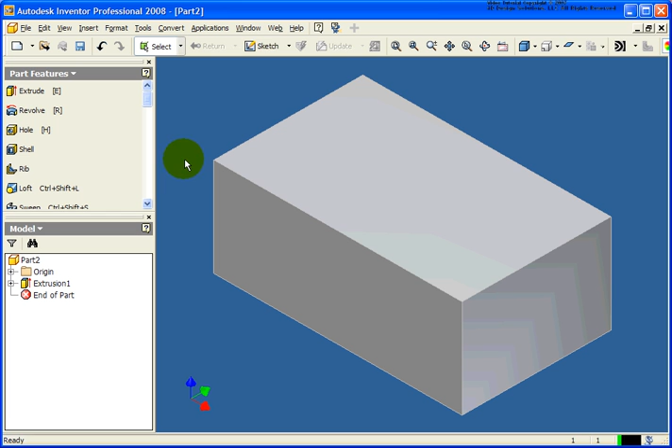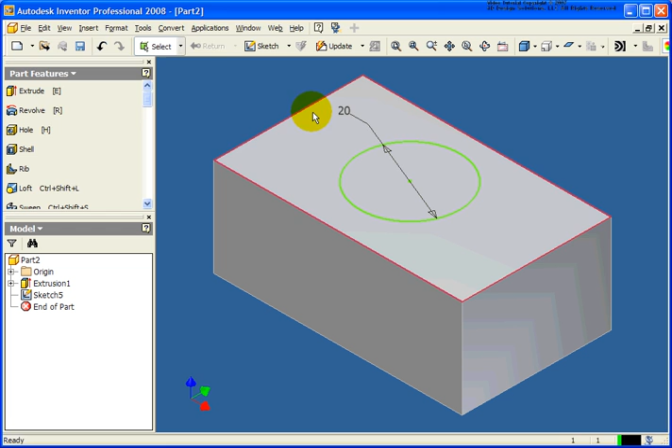So to start off with here, I'm going to create a sketch on the top of this rectangle that I have. I'm going to place in a circle, and I'm going to dimension that circle, and let's make it 20 millimeters in diameter. I'm going to return, and let's extrude that up, and let's take it up 10 millimeters.

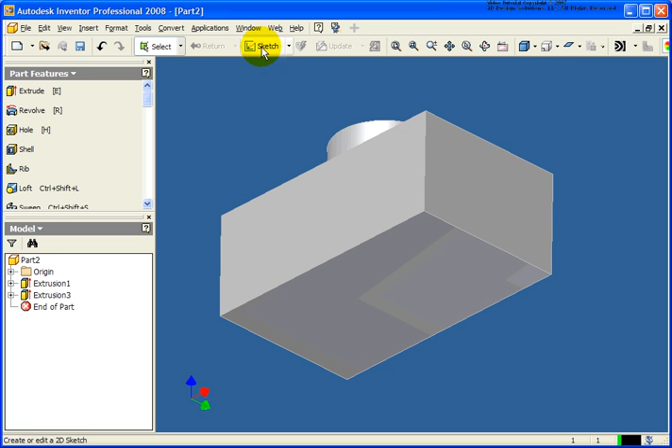So what I want to do now is have the exact same feature on the bottom of this, except in this case I want to create a cavity from that geometry. So I'm going to place the sketch on the bottom plane of the part. But now instead of redrawing that circle from the 2D sketch panel, we'll scroll on down till we get to the Project Geometry tool, and I'm going to select the circular edge. Now in this case it wouldn't matter if I selected the top or the bottom, being that they are exactly the same.

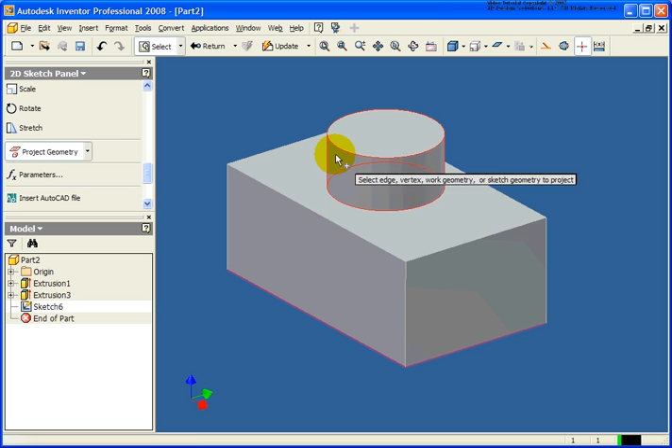Now if I spin the model around, you'll see that that circle has been projected, and what I'm going to do in this case is extrude that circle, and I'm going to cut the geometry in 10 millimeters.

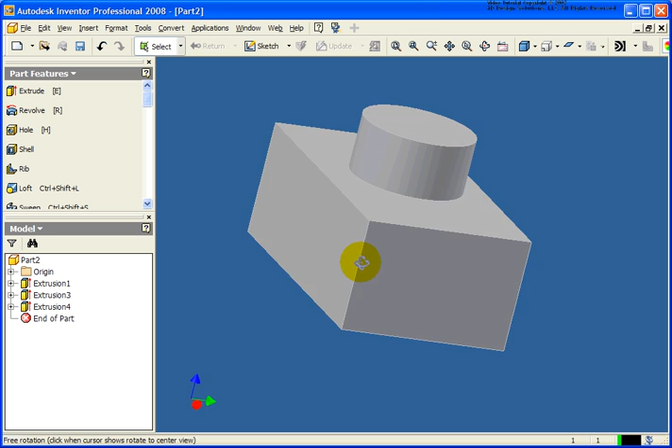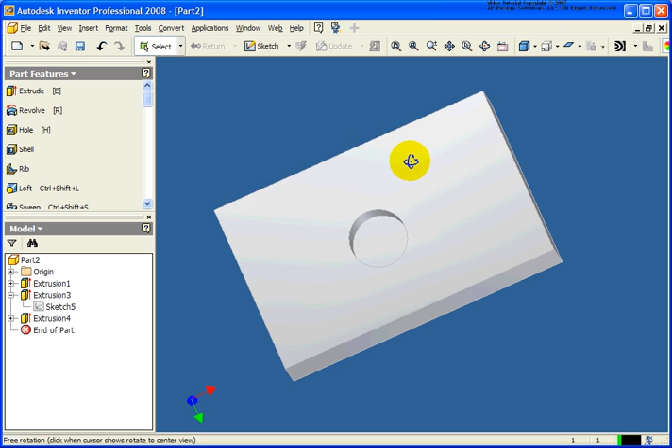Now there is a relationship between those edges at this point. So let's go back and modify the 20 millimeter diameter, and let's make it half the size, make it 10, update, and it updates of course the top extrusion, but you'll notice that the bottom cut has also been changed to match the projected edge.

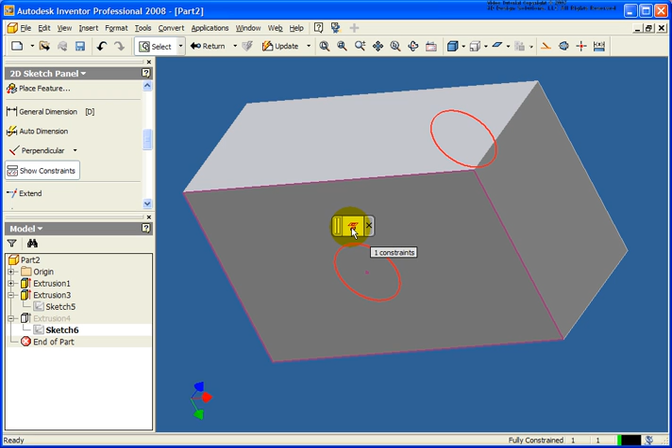Now if I want to break that relationship, I can do that. I'm going to make sketch 6 the active sketch, and from the 2D sketch, let's click on Show Constraints, and the constraint that's appearing here, this is a reference constraint, and I'm going to go ahead and delete that reference constraint, and let's do an update. So of course that reference constraint, it's basically tying that relationship.

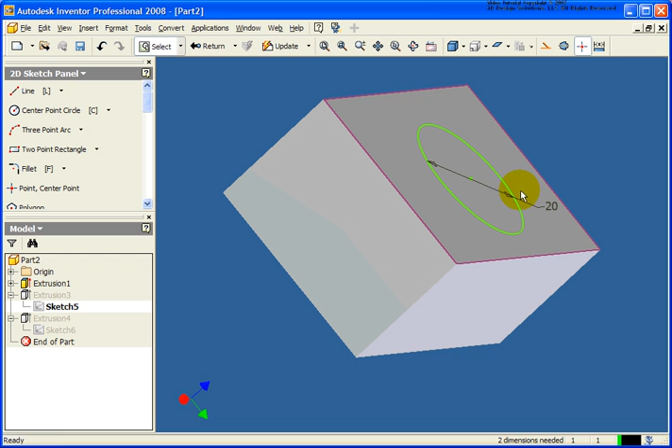So let's make this larger again. Let's change it back to 20. The top extrusion updates, and the bottom did not. So I broke that link, and once that link is broke, you basically would need to go back and reproject that edge if you wanted to reassign that relationship.

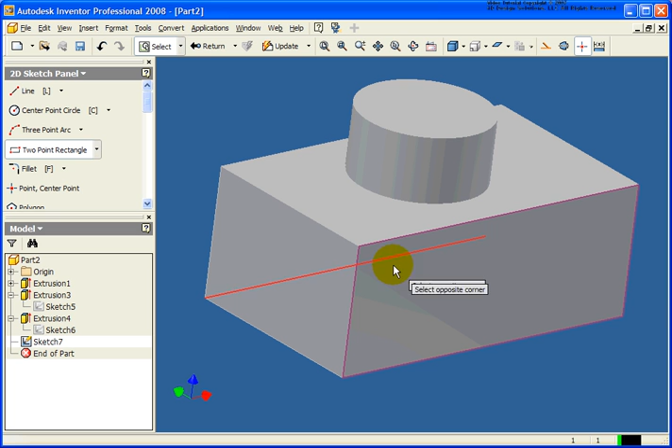Now, we're going to do one more. I'm going to make a sketch on this front plane. I'm going to draw in a rectangle. And we'll do the same scenario. We'll make that go a little bit larger. Now, in this case, we'll do the exact same scenario.

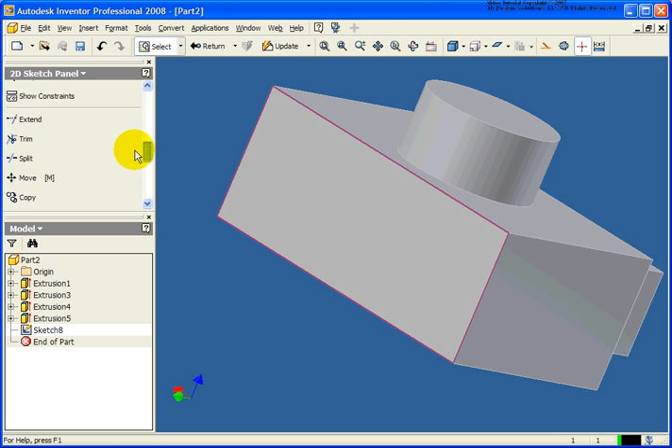I'm going to make this front plane the active sketch, and we're going to slide on down here until we get to the Project Geometry tool. But the difference here, instead of selecting the individual edges, I'm going to select right in the middle of the plane. And by selecting inside the middle of the plane, you'll see that it projected all of those edges that fell on that plane. But if I go down to the browser, expand that, you'll notice that there's an entry here called Projected Loop. So if I right-click on that, there are some options here.

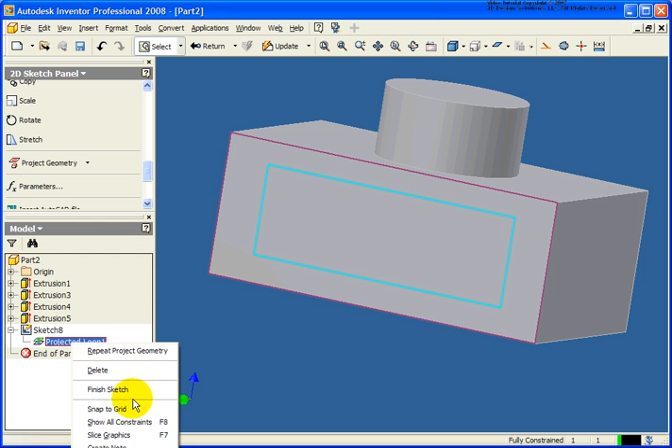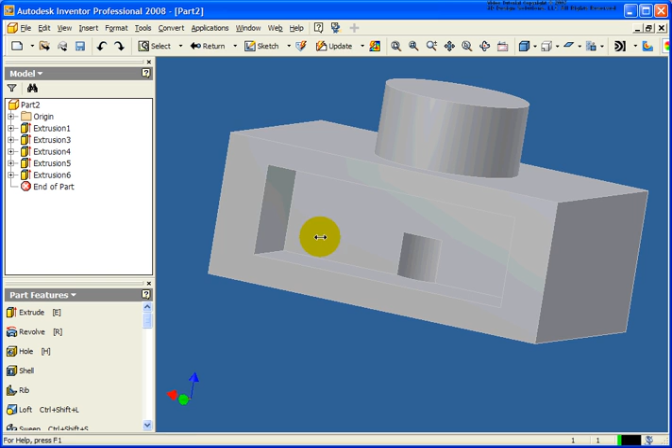And let me bring the browser up so we can see it a little bit easier. If I right-click, so of course I can delete it, but I can also break that link. So let's not break that link quite yet. I'm going to again do a cut here. And let's make a change to the first sketch.

And I'm just going to slide these edges down, do an update, and of course that change appears to the back side here.

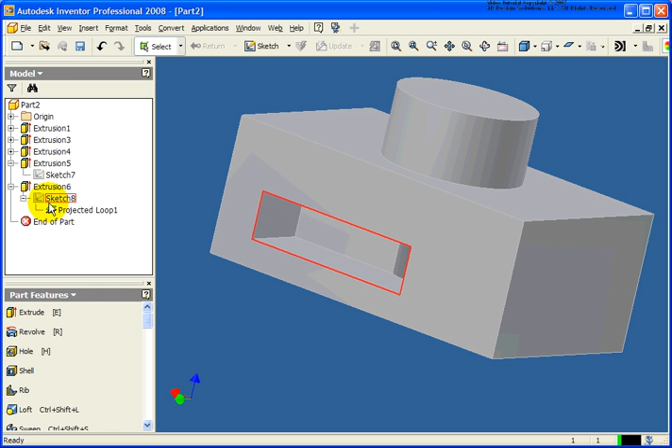Now to break that loop, what I'm going to do is I'm going to make the sketch active, right click, and say break link. So let's do return, and you notice the cutout still happens correctly.

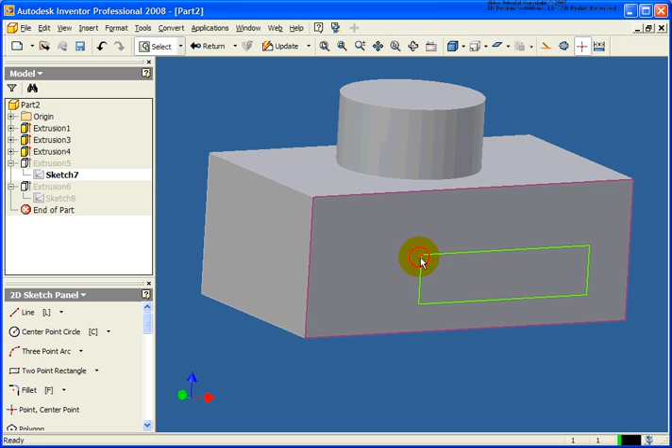But again, let's go back and make a change. I'll just grab those edges, make them fairly large. And you'll see that change did not occur on that back face.

So now if I went back and made Sketch 8 active, I can go back and place whatever other dimensions I want. Again, there's no way to go back and make that relationship back into place here. Once it's broke, it is broke. So if I right click here, you'll see that there is no option to recreate that link.